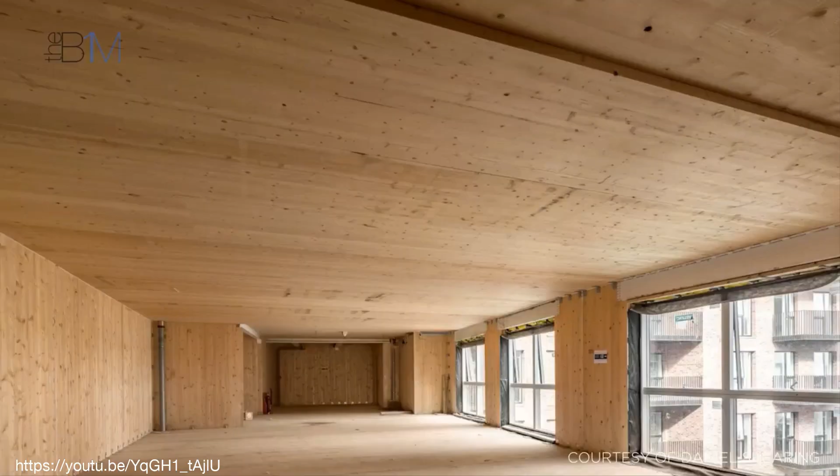Although it's made out of timber, the timber here is a solid panel. So trying to light the timber here is much like trying to light a log with a match. It's a very hard material to light, so it makes it a much safer material to use. Now, I work at a university and we have a lab, and lighting a log with a match sounds like a challenge, but we'll come back to that later.

The key thing is that there's quite a lot of simplifications here, and some of those are about persuading people that actually there are hazards here that are maybe not what they seem, but there is always a danger of oversimplifying these things. And if we oversimplify, then we can actually give people potentially a false sense of comfort, where in fact they should be engaging with the hazards and thinking about how to mitigate them.

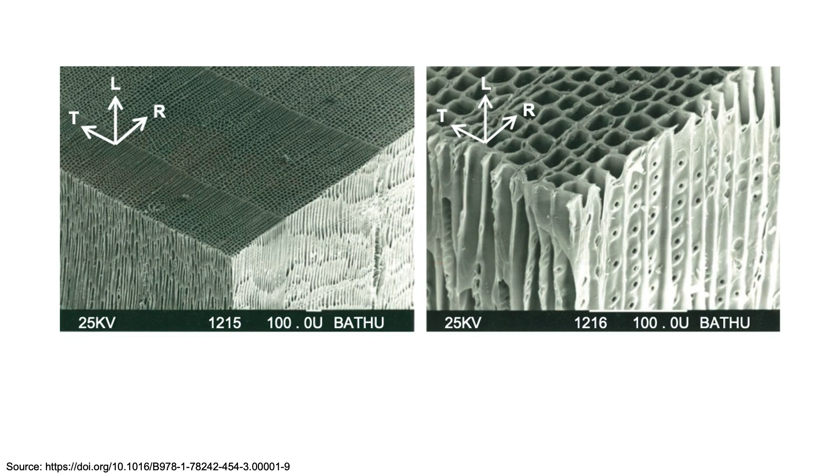So what I want to do is unpack timber as a material. I want to think about what timber is. So if we go and look at some timber, I mean, it looks amazing, it looks very beautiful, but it doesn't tell us a great deal about it. If we look a little bit closer, then what we can see is the structure of the inside of the timber. And I think the analogy is often made to a set of straws that are sort of stacked, lined up next to one another. And that's where the nutrients and the moisture is transferred through the tree, and it forms the wood itself.

So if we look at the composition of that, there's essentially three main parts to it. The first part is carbohydrates. About 70% of the timber is comprised of carbohydrates. The second part is lignin. About 25% of the timber is comprised of lignin. And then there's sort of a residual trace of minerals there. So if you think about the carbohydrates and the lignin, those are both organic molecules, so they can burn. The minerals are not. They're going to be inert, and they're going to be what's left after the thing has burned.

So when we think about carbohydrates, one of the first things we think about is food and the calories associated with carbohydrates. So of course, if we're making something out of carbohydrates, then it's got quite a high calorific value. Lignin is a little bit of a funny one. Lignin is the stuff that if you're going to smoke some food, you want to get the lignin out into the gas phase, and it's what gives your food that tasty smoked flavor. So it's the pyrolysis of lignin that leads us to have smoked food. The minerals are just what we have left behind after everything else has reacted and combusted and gone away. So that's the ash that you would see at the end of a campfire.

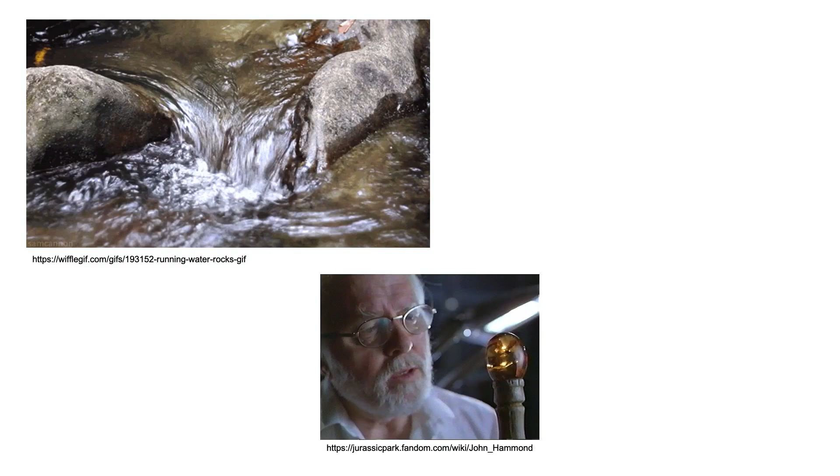So those aren't the only things that are going on in timber. We've also got some other materials as well. We've got water, quite a lot of water in trees, and they're often dried out quite a lot in order for us to use them in the built environment. And then we've got this stuff called resin. Resin is the stuff that Richard Attenborough had his preserved mosquito in, which comes out of a tree and is stored within a tree. When it solidifies, you can preserve your mosquitoes in it, but it is dissolved in a liquid, and that liquid is turpentine. And of course, turpentine is very flammable. So there we go. We've got quite a lot of different things going on just within a tree.

Some of that is part of the wood structure itself, and some of that is kind of mobile within the tree. And if we look at what happens as we heat the timber, if we take a tiny little sample and we heat it from 0 through to say 600-700 degrees, it starts off with 100% of its mass and then it dries out. Once it's dried out, it doesn't do very much for a little while, and then once we get to about 200 Celsius, it starts to degrade.

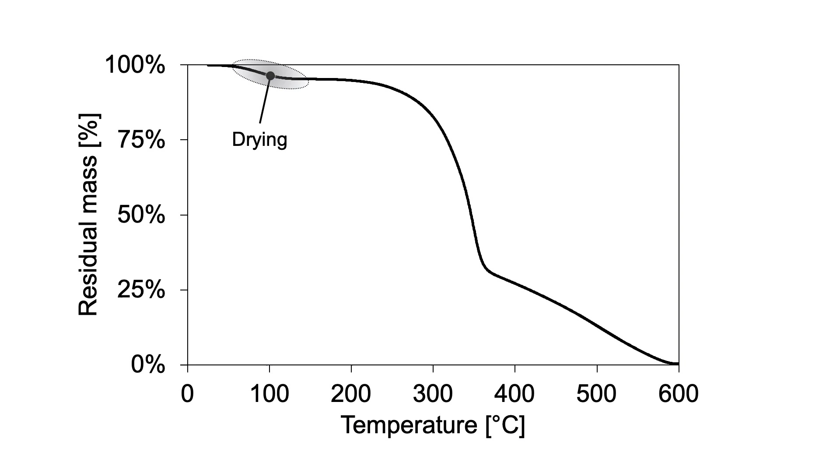And what we have is a reaction of the material to the heat, and that's the pyrolysis. So we start to get pyrolysis gases leaving the timber. Once all of those have been driven off, we're left just with carbon, and that carbon then continues to oxidize from around 400 Celsius through to kind of 600, something like that. And at the end, of course, all we're left with is that ash.

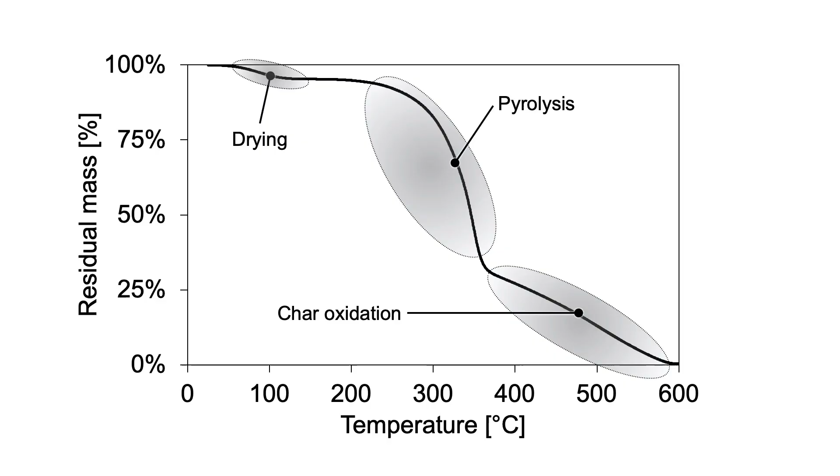So what I want to do is I want to look at these processes visually. I want to have a look at them as well as looking at a graph of them. And if I were to take a block of timber and I were to expose it to a radiant heat flux, so using a mass loss cone or a cone calorimeter, what we would see is we would start to see those processes. And if I expose it to a relatively low heat flux, then they can happen quite slowly and we can get a nice little look at it.

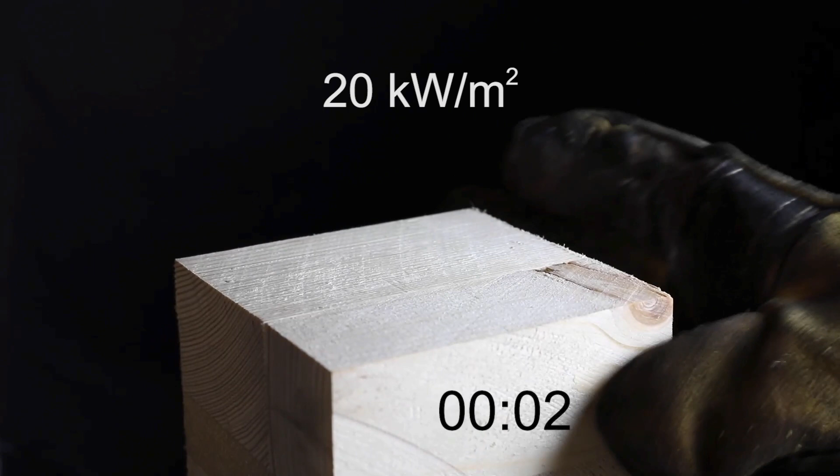So here we've got a sample of timber being put under a mass loss cone. The heat flux on the surface is 20 kilowatts. So initially not very much happens, but if we speed it up, what we can see is that we have a pyrolysis reaction taking place. So the fuel is being driven off from the surface of the material into the gas phase, and what we have left behind is a char.

Now, under 20 kilowatts, that's not enough to ignite the fuel, the pyrolysis coming off by itself. So what I need to do is I need to introduce a pilot. So I can light, if you like, a log with a match if I'm already heating it at around 20 kilowatts. And so what you can see then is we have a flame forming, and that is spreading over the sample and is continuing to burn. Now, if I turn the heater off, what happens is that will just go out.

So let's just look at that a little bit more closely. What we've got here at the bottom is the virgin timber. Then what we have is the pyrolysis gases being driven off, and what is left behind is that carbon, is that char. We've also got ash forming on the surface here, and of course when I light it, those pyrolysis vapors, they ignite and they start to burn.

And this brings me to the first thing that I wanted to highlight. If we're relying on a char layer to protect our structure, then what we have to recognize is that char is created by pyrolyzing the material. The char is created by releasing flammable vapors. And so what that means is that if we want a char layer, we have to generate fuel, which of course has the potential to be ignited.

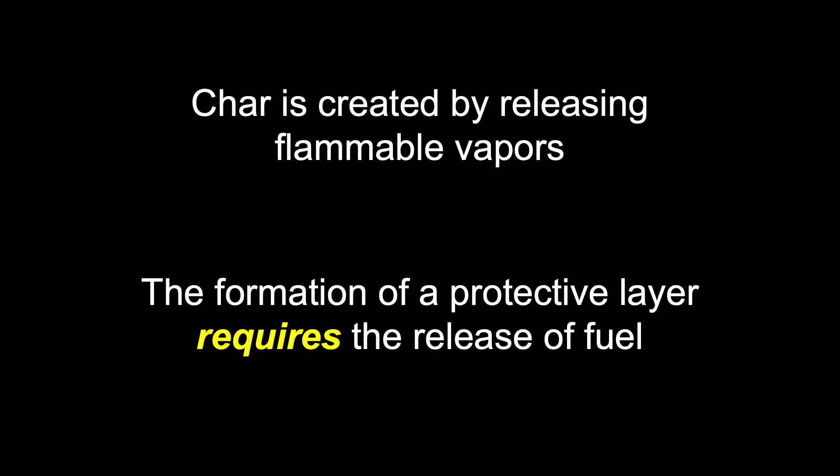And if it's in a big compartment fire, then there's always going to be a pilot there to set it off. We're always going to end up burning our timber in order to create the char layer that's going to serve to somehow protect it. So why does this matter? Well, I think some of the other speakers are going to talk about compartment fires and these kind of things, so I'm not going to go into too much depth there because I'm sure they're going to cover it.

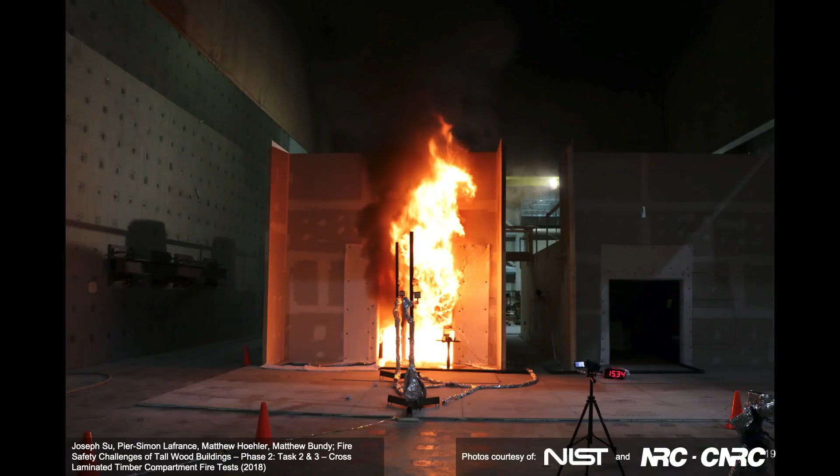But if we look at this example, and so this was a test that was run at NIST by Joseph Su and Matt Hoehler, and thanks to them for giving this photo to me to use. What you end up with, if you have lots of exposed timber in a compartment, is a very big fire. Now, of course, I've not shown you the reference case here, but suffice to say you release a lot more fuel if you have timber linings than if you don't. So you get bigger flames, you get a bigger heat release rate, these kind of things.

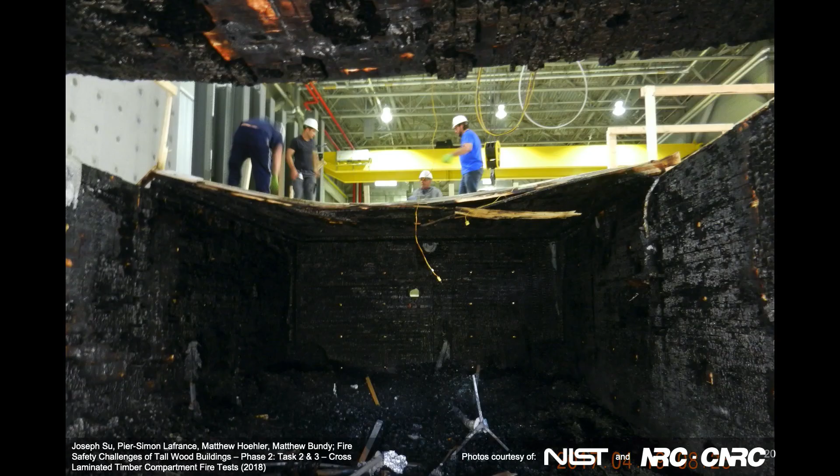And of course, there's always the possibility that our timber compartment might not go out. So in one of the cases that were tested at NIST, the compartment just continued to burn until there was some kind of failure, and I guess it was extinguished manually. And so this is a little bit of a concern. By bringing this fuel in and relying on the release of fuel in order to form a char, what we're doing is we're really changing the hazard that we have within a compartment.

Now, one of the key questions, of course, is: is my fire going to go out? Is it just going to keep on burning until someone comes along and sprays some water on it? Or is it actually going to go out by itself, like the example that I just showed you a few minutes ago? And the answer to that will depend on the particular configurations and the fire dynamics within the compartment.

So essentially, if there's enough feedback to the timber, well, the timber will continue to burn. If there is not enough feedback, or if it managed to form a thick enough layer of char, then the compartment might start to go out. And of course, this is where we get lots of complications in terms of delamination, because CLT is comprised of many layers. So we might have delamination, bits of it falling off and then continuing to burn.

And we have a lot of complexity in terms of the interaction between the burning timber and the compartment fire dynamics. But as I say, I think some of the other speakers are going to be talking about that a little bit. So what I wanted to do instead is really dig deep on this question of the char itself and what is going on within the timber.

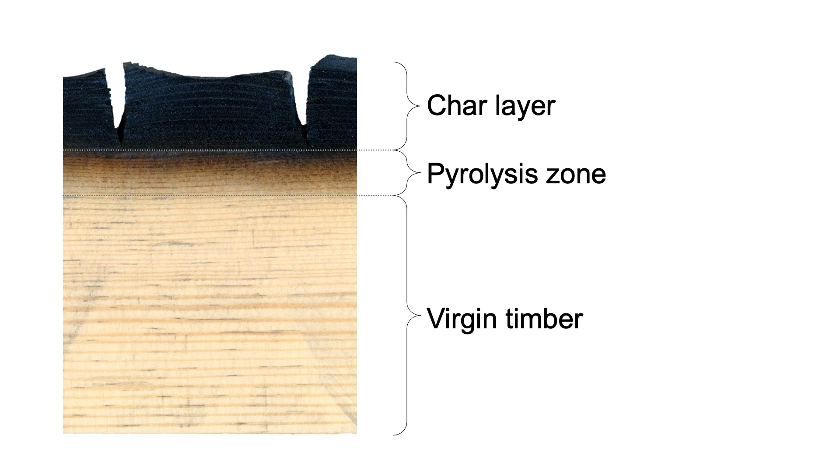If there's a lot of heat transfer to that zone, we're going to gasify a lot of fuel, and that means the timber is going to burn relatively vigorously. If we have very little heat transfer to that zone, then everything's going to slow down a lot, and the timber, I guess, eventually is going to go out. So understanding how the energy is arriving to that pyrolysis zone is absolutely critical in terms of understanding how the timber burns and whether or not it's going to go out.

So if we go back to the example that we were looking at before, we've got the mass loss of the timber. We can see those vapours escaping from the surface. And they're being driven off by an applied heat flux. And the thing that links those two is the heat of pyrolysis. And so we can write that as a simple equation.

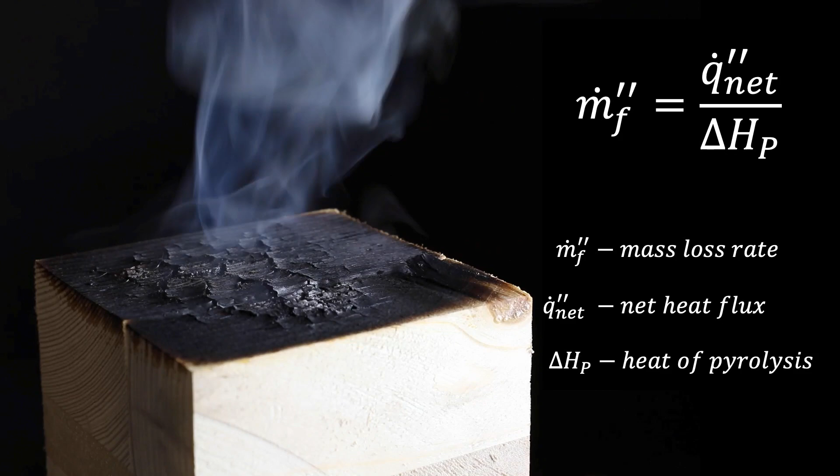So we can say that the mass loss rate of the fuel is equal to the net heat flux divided by the heat of pyrolysis. And of course, that's going to be true irrespective of whether or not the thing is on fire. So if I light it, that's still what's going on. But now I've made my problem just a little bit more complicated, because it's not just the applied heat flux to the surface that is going in. I've now got a flame there, which is creating a feedback and is making it quite a lot more complicated.

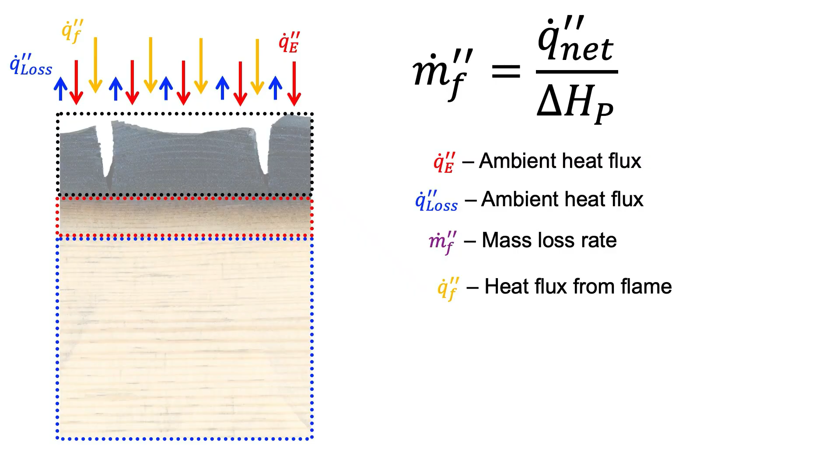So if we break this down and we look at it, there's quite a few components here. So we've got the heat flux arriving at the surface of the sample that's imposed from somewhere else, in that case, the cone heater. And we've also got losses from the surface. If we have a flame, then we've also got the flame heat feedback. But there's also some other things going on here. We've also got the potential to release energy in our char due to the oxidation process.

And of course, we've also got the potential to store energy in our char as it gets hot. And finally, of course, we've got the losses of energy out the back of our timber. And so there's quite a lot of things going on here in terms of, well, what is the net heat flux arriving at my pyrolysis layer? It's actually going to be a function of all of these different things.

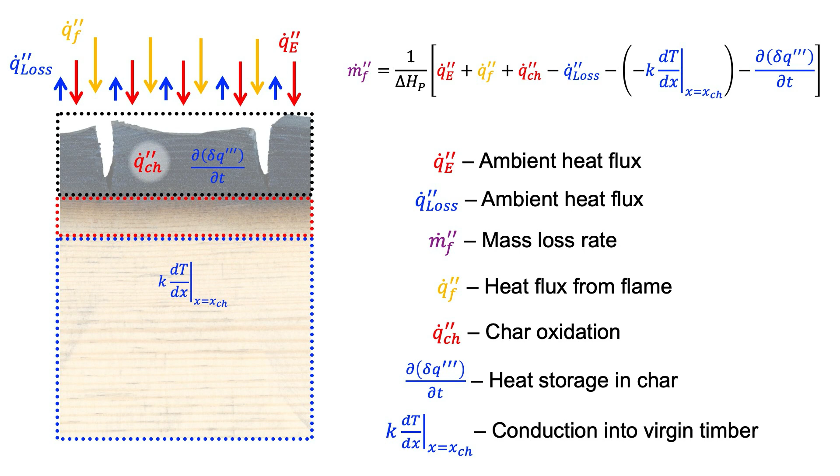And on the one hand, this makes it look like a horrible equation, but on the other hand, what this allows us to do is think quite rationally about how we might quantify each of these different components and which of them are more important in which situations.

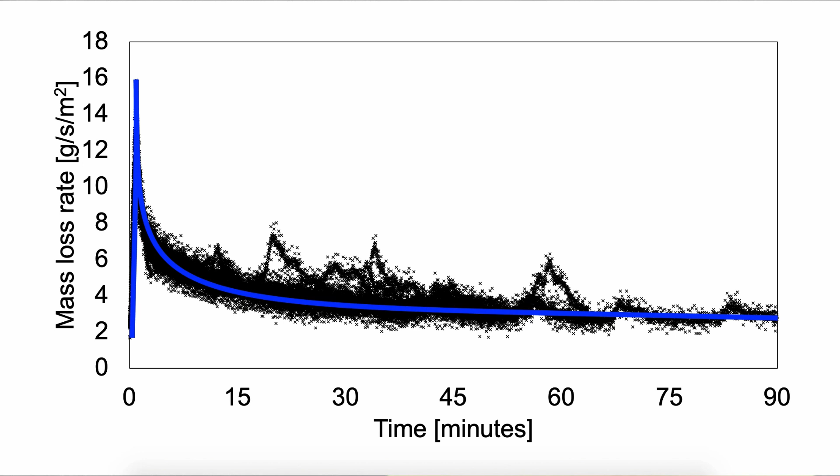Now, what Snorri did was he did that a whole bunch of different times. So he did multiple repeats, and he got the same kind of behavior as you would expect each and every time. And so what this means is if we're looking at how timber behaves, there are some aspects of it that are very predictable. And that's something that people like to say about timber. It burns in a predictable way. And we can draw a line that looks something like this all the way through our data, and we can say, yeah, we understand pretty well how the mass loss rate responds as a function of heat flux and as a function of time.

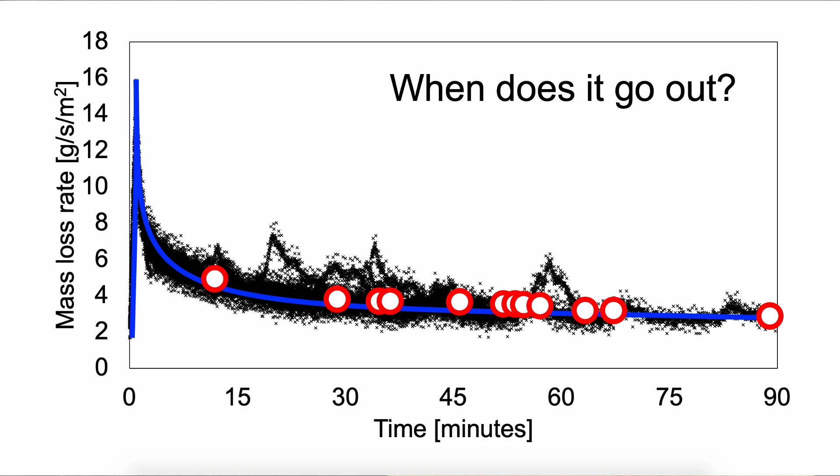The trouble is, though, and you probably noticed, is all those curves stopped in different places. And that's because what we were doing is looking for the extinction. When did the timber go out? And we've got a real range there. The quickest one went out in around 13 minutes. The longest took around 90 minutes. And we have everything in between. So this is kind of problematic because on the one hand, we know pretty well how the timber is behaving. But on the other hand, actually, there's quite a lot of variability in potentially one of the most important parameters, which is the point of auto-extinction.

Now, to give you an idea of what this might mean for a piece of timber, the difference in the mass loss between these different samples, so the one that went out really quickly had only lost about 10% of its mass over the duration of the experiment. The one that burnt for 90 minutes had lost about 40% of its mass over the duration of the experiment. Now, if we're thinking about the residual capacity of sections, how much timber is there left in my building in order to ensure that people can evacuate or to support the operation of the fire service, then losing 40% might be quite a problem compared to only losing 10%. So it really matters to understand when is this timber going to go out.

And one of the challenges, although we heard at the start of this talk that the science is done, the science is there, is that, well, we do have a good understanding of some aspects, but translating that into predictions is really very challenging. And I would say we're not there yet, even for a very small piece of timber like we saw in the experiment, let alone a 13-story timber building.

So this brings me to the first point that I wanted to really make, I guess, which is we know quite a lot about how timber burns, but there's also a lot that we don't know. And if you're a design engineer working on a project where you're relying on the extinction of the timber, then that should be of concern to you, because you need to understand where our knowledge is good and where our knowledge is confident and where actually we don't really know. Are we actually designing, if you like, in the dark?

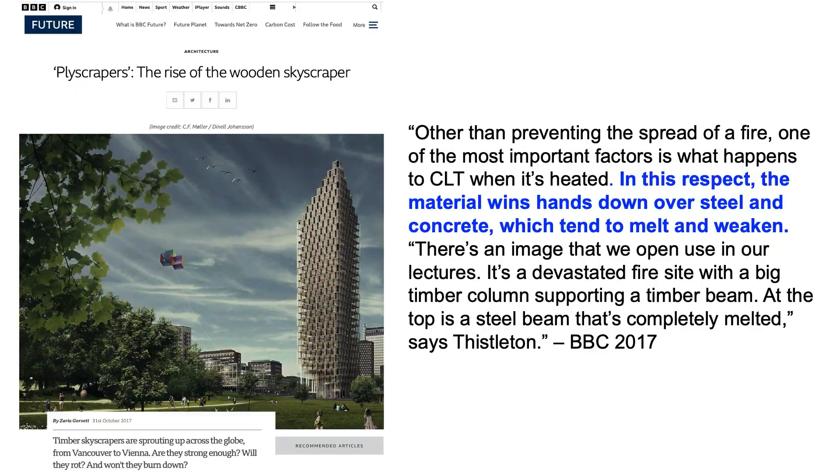And so I wanted just to unpack that a little bit, because as we saw at the start, it's safer to be in a mass wood or in a wooden structure building than being in a steel building, whatever. So what I wanted to do was look at this in terms of a comparison between timber and a more traditional material, concrete.

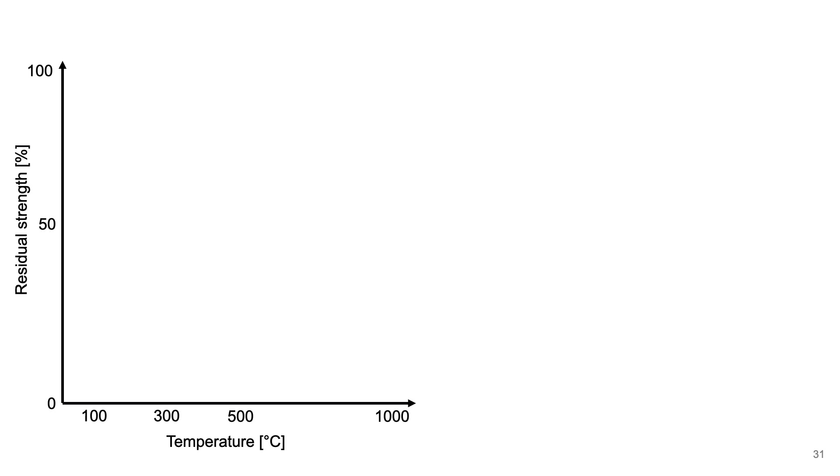So what we've got here is temperature along the x-axis, and the residual strength up the y-axis. And concrete doesn't do very much up to about 100 Celsius, and then it starts to degrade, and by the time you get to 400 or 500 Celsius, it's degrading very rapidly. And if we look at what happens to a concrete slab, for example, in a fire, what you'll see is that the surface of the concrete pretty much tracks the gas temperature of the fire. So it gets very hot very quickly, and of course has got no residual capacity left.

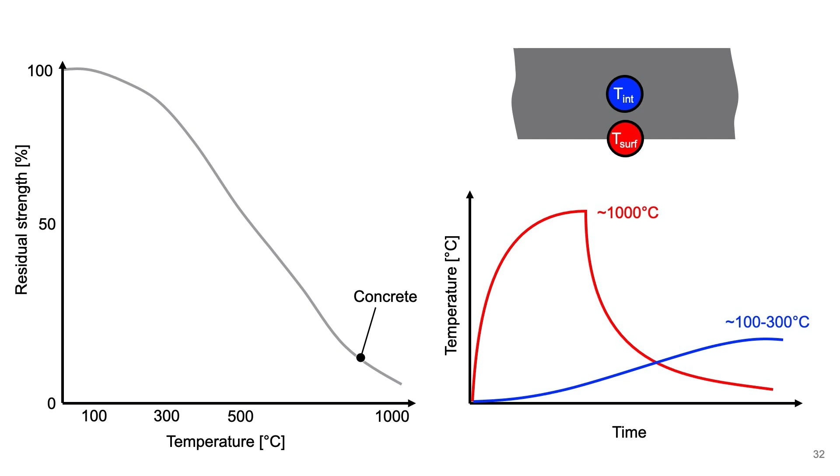If we look further inside the concrete, what you'll see is that starts to get hot as well, but it takes a little bit longer. And in fact, the concrete can continue to heat quite a long time after the fire has gone out. Now, if we look at timber, the same thing is true. But if we look at the residual capacity of timber as a function of temperature, then actually we get something quite dramatic. So we get a real drop-off at 100 Celsius, and of course by 300 Celsius, the timber is just not there anymore. We just have char left.

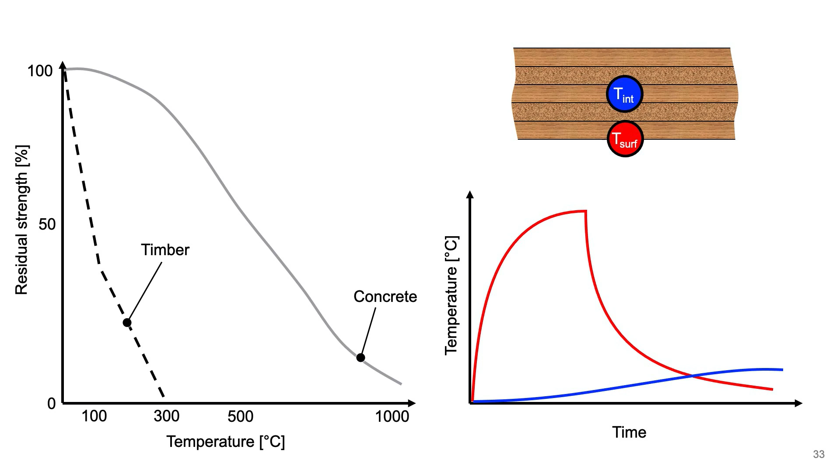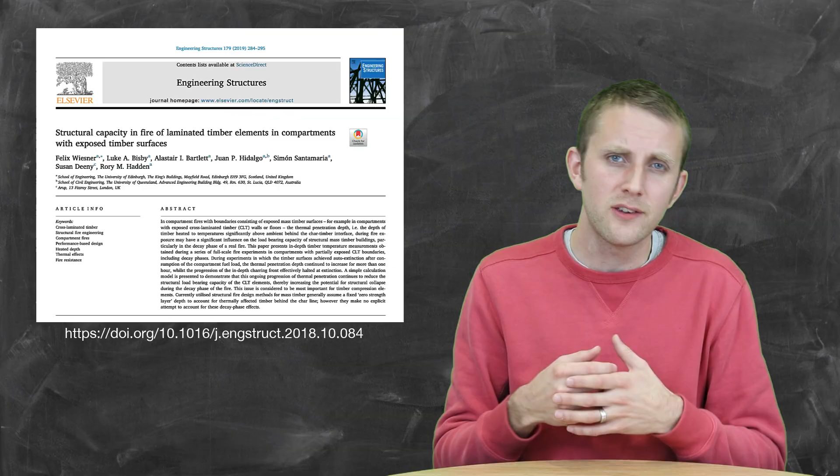Now, this starts to matter when we start to look at large elements of timber and how they're used. And so this was a little piece of research that was done by a colleague of mine, Felix Wiesner. What he did was he took some data that had been generated for a real project in Norway. The design engineers had taken their timber columns, that were huge, put them in a furnace, subjected them to a 90-minute fire, taken them out of the furnace, they'd gone out, and they continued to monitor the temperatures. And they calculated, well, what would the crushing capacity of that structural element be as a function of time?

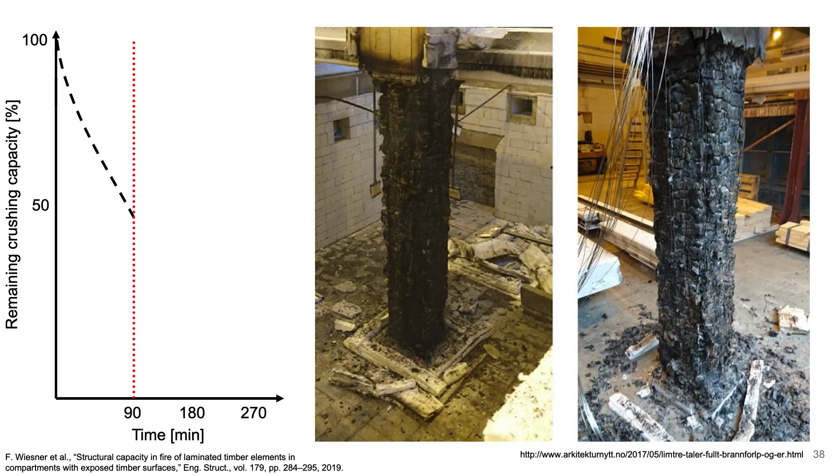And what they found is that after the 90 minutes, they still had around 50% of the capacity of the column left, which is typically enough to bear the fire limit state loads. Now, what Felix Wiesner did was he took that same data and he just continued to make the calculation after the 90 minutes. And of course, what he found was that the temperature inside the element continued to rise, which meant that the structural element continued to lose strength. And after about 270 minutes, there was only 13% capacity left within these structural elements.

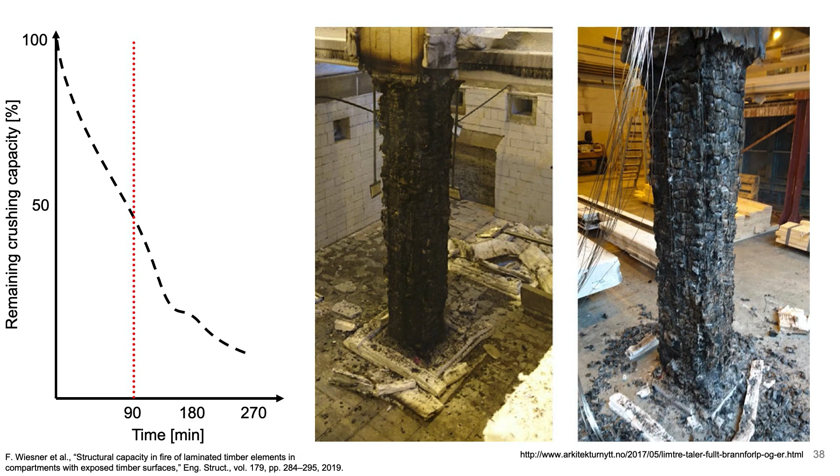So if you're working on a project that's relying on the structural elements to support, for example, firefighting operations, you might want to think quite carefully about whether or not you believe they're at risk even after they've put the fire out. Similarly, if you're designing a building that has a stay put or a defend in place strategy, is it okay to leave people in that building even after the fire has gone out if the structural capacity is going to continue to degrade?

So that pretty much brings me to my second and final point, which is that timber is weak at warm temperatures, and we need to be really careful with that until we've understood what that means for our structures. So that's pretty much everything that I wanted to say. I guess the last thing is just to say if you are working on one of these buildings, then just take care that you're not getting pushed into doing something that you're not entirely comfortable with, or that is starting to violate the assumptions of the methods that you're working with.

Similarly, don't get pushed into doing something that isn't yet supported by the science, because you're taking a real risk with that in terms of both what you're doing and also potentially the people occupying the building. And last but not least, please don't just wave your hands and say, whatever. Think about the hazards and try and address them systematically.